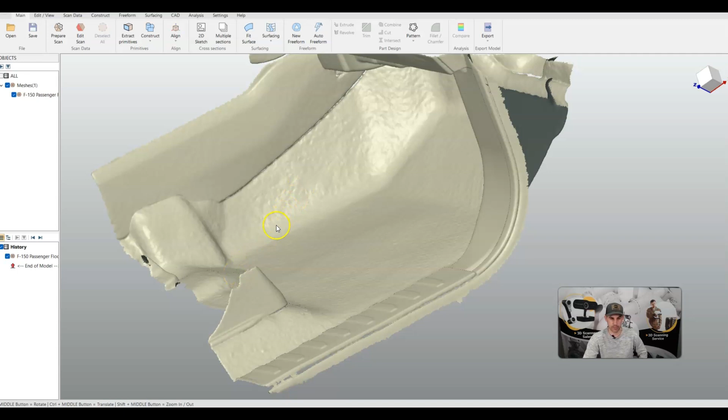All right, so we are now looking at Quick Surface Pro version 2025. I have brought a scan already in here. This is one that we completed on a large pickup truck, the passenger floor area. And as you can see, there is a lot of floor geometry here.

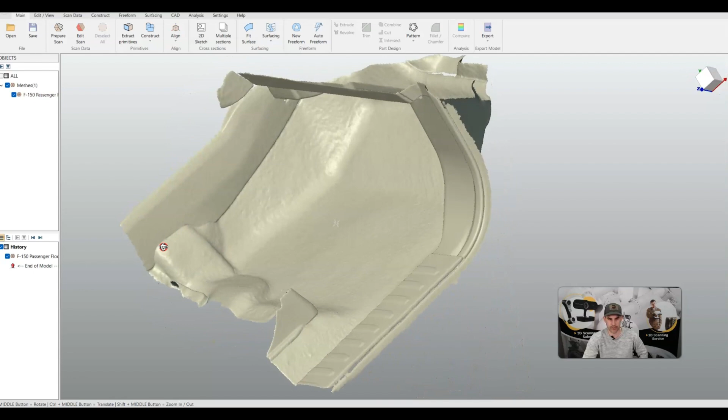I'm going to go a little bit overboard and make different patches for all the different surfaces. So we'll have one for the side of the center console here, the main floor area, where it slopes up, and maybe just a little bit in front of the seat here.

What we need to do, and this is not a very complicated process, is create polylines closing off individual areas. We're going to do that in the Surfacing tab, using 3D Sketch. The default mode it goes to is adding a curve.

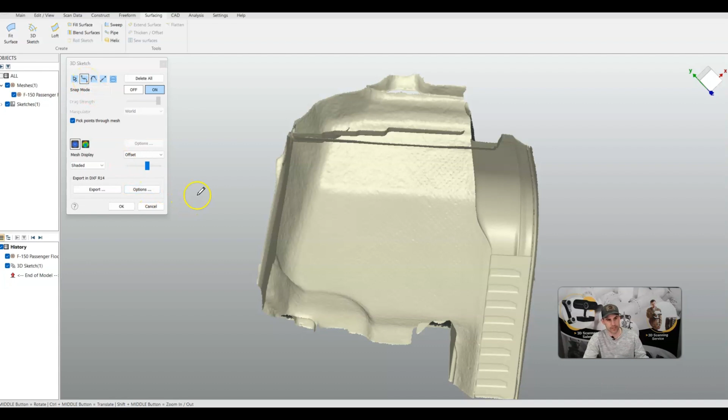So we can basically add polylines along the sides of the areas we want to create. As you bend the line around, it tries to make a nice consistent curve, so you can add as many points as you want to follow a curve. Every time you attach a node, it will reattach it to the mesh underneath in that location. If you double click, it finishes the line, and then we can pick up that again.

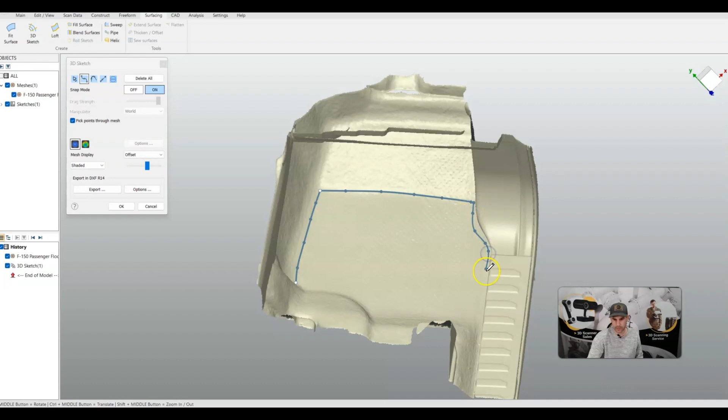Stop one there, and make a nice little S curve right along the door. If you ever make a weird shape or drop a node somewhere you didn't really want to, it's not bad, you can just go ahead and move it right after. I'm going to finish this line here.

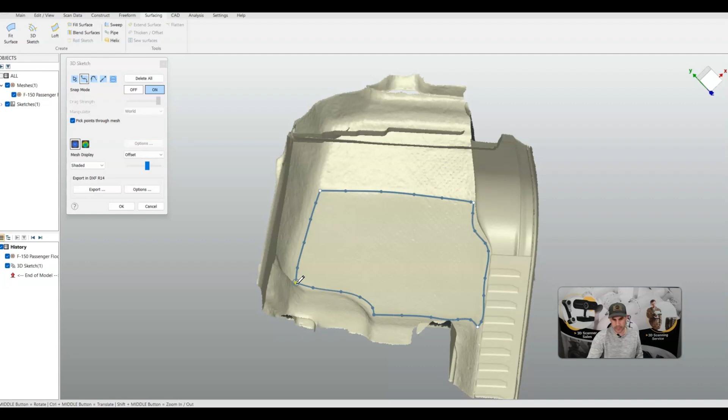So we can pick our pointer selection and zoom in. Let's say we want to move this one here just a little bit over, that's fine, you can edit it very easily. Once we have a complete line around, I'm going to move this one because I did some weird stuff right here. Fix that a little bit.

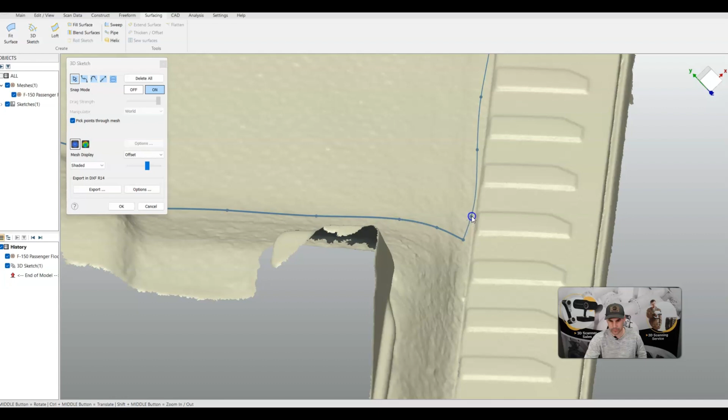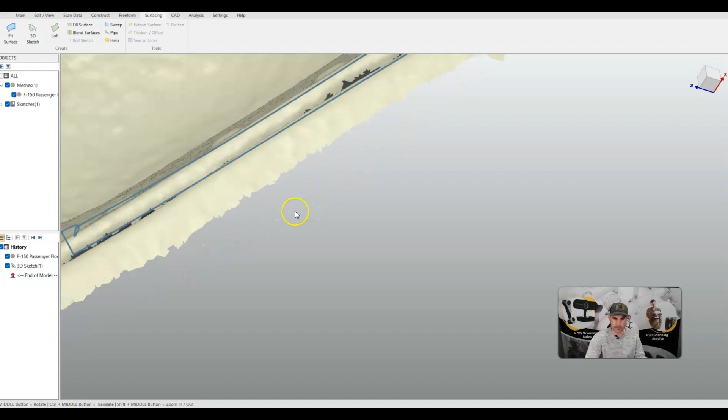That looks a little bit better. So we have one complete shape. What we're going to need to do in order to turn this into a flat piece—if we look at it from the side, it has some 3D shape, it's actually not too bad, it's a little bit flat, but there is some 3D shape to it. So we can't really export this as a 2D shape into whatever the CNC machine or software we're going to use to create the CNC cut surfaces.

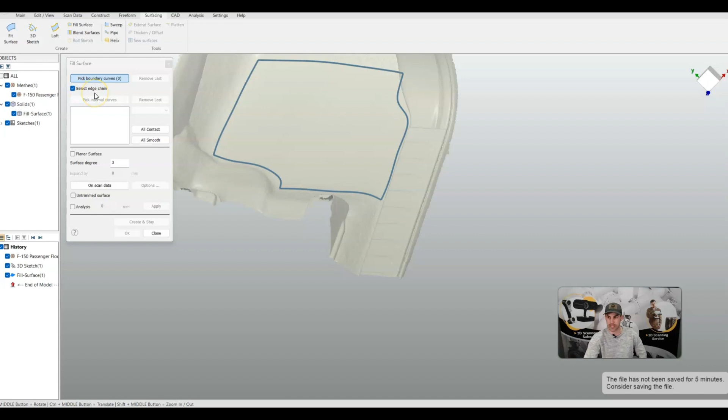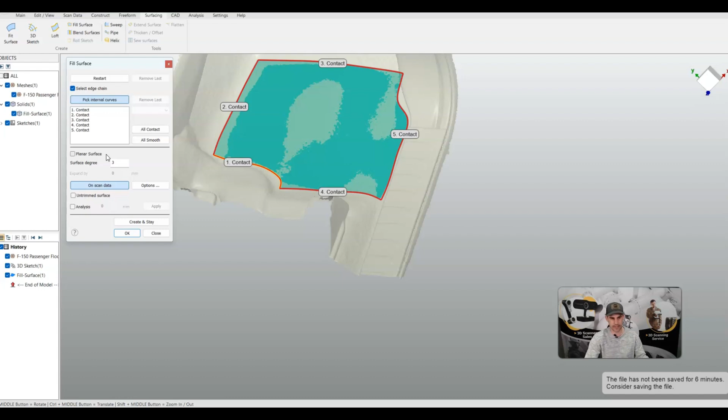So we want to click on our fill surface function. We're going to click on one part of the chain, so you can see it just highlights the part that I'm hovering over. If you have this text box selected where it says select edge chain, it will populate that whole area. You can kind of see how it's interacting with the data—there's a little bit where the line or the plane goes through the scan data. If we click on scan data, it will actually adjust that whole surface to try and fit the underlying scan data very closely. So we're going to say OK.

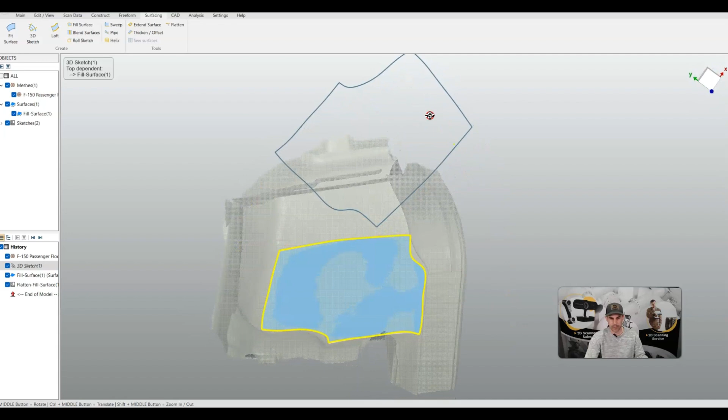And then the last step to make a surface here, we can click on it again, and we have our flatten at the top. We do that and it will just create a 2D cross section out here in space. But as we said in the beginning of this video, we want to do the side of the center console here—we want to go right up to the front. So we're going to create a few more patches.

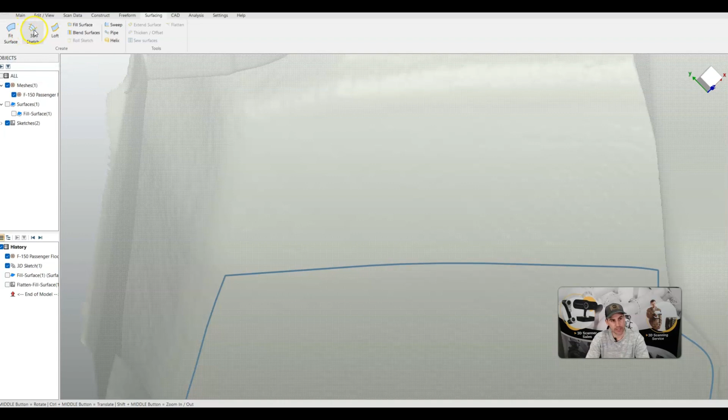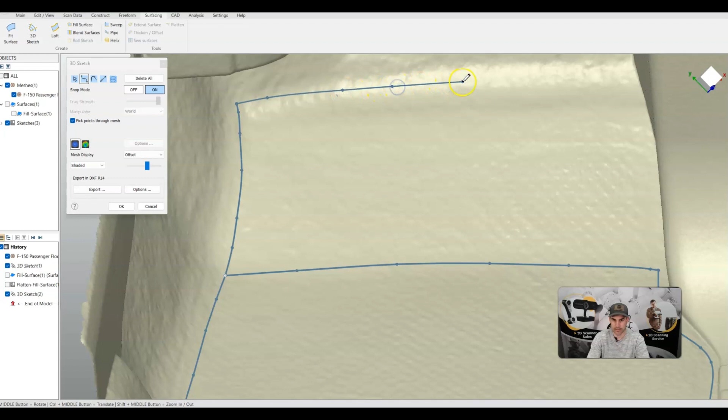The process to add extra panels to this one we already created is going to be pretty simple as well. We're going to go back to our 3D sketching tool, under the surfacing tab, and basically do the same thing we did with the first one, but we can attach the second panel to the first one. So I'm just going to click on the corner node here, and then we can attach all the way across. Yeah, that's pretty close there. Now we've created another box. We're going to hit OK.

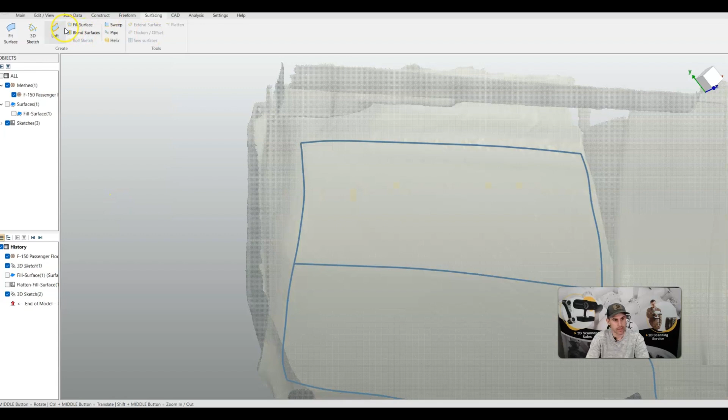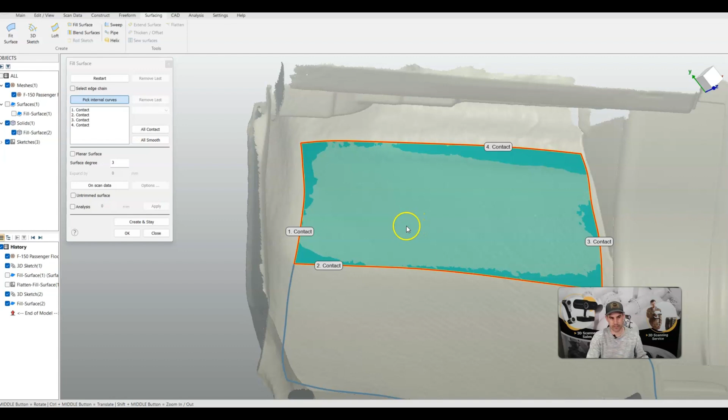And we're going to do that same fill surface, except this time I'm going to deselect the select edge chain. The reason is it will try to select everything connected in order to create a single surface, but we want to actually tell it which ones we want it to select. So connect those four—once we have a complete closed loop, it will automatically give you a preview of the surface. We're going to click on scan data again, and that's going to try and stretch that mesh so it represents the underlying mesh underneath it. We're going to hit OK. Now we have surface number 2.

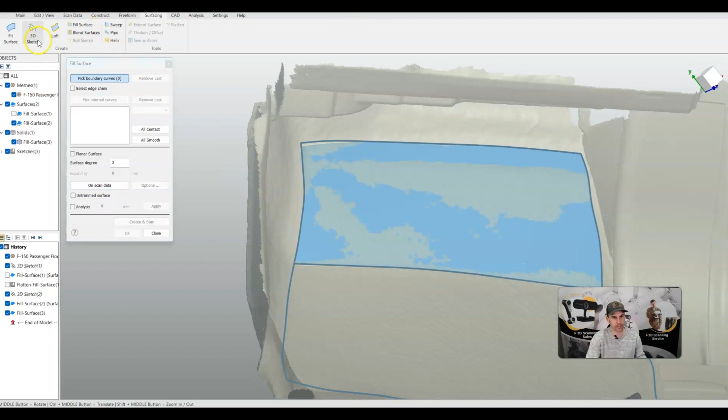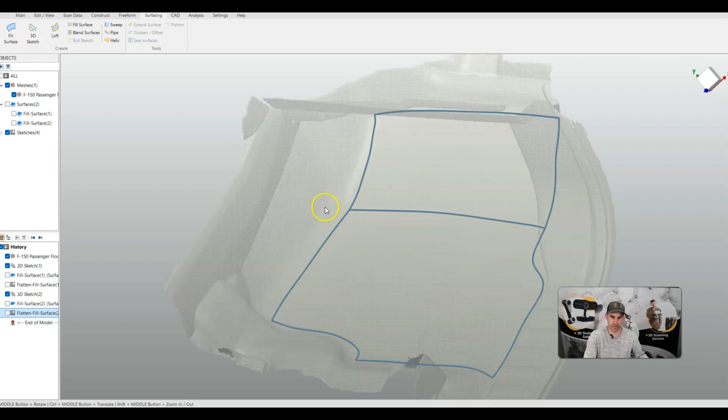And if we want, we can go ahead and do the fill surface—or pardon me, we already did fill surface—flatten as well on this one. So we select that surface and hit flatten. Now we have another one over here. I'm going to hide that flatten and fill again, and I'll do one more with you guys watching, then finish the rest without you watching. So again, 3D sketching tool—I'm going to select this corner node, and we want to come all the way up to the center console. Double click to finish a corner.

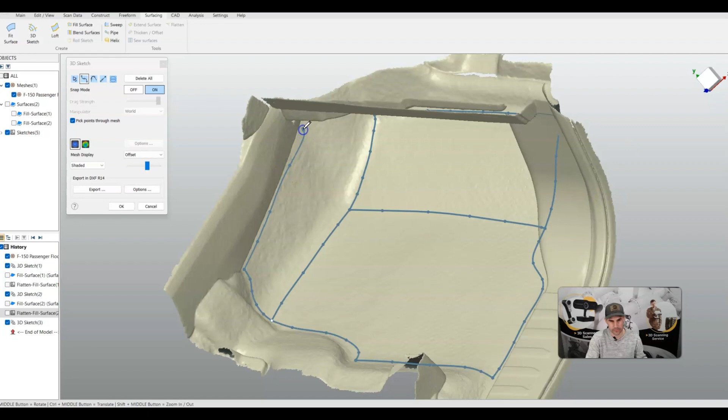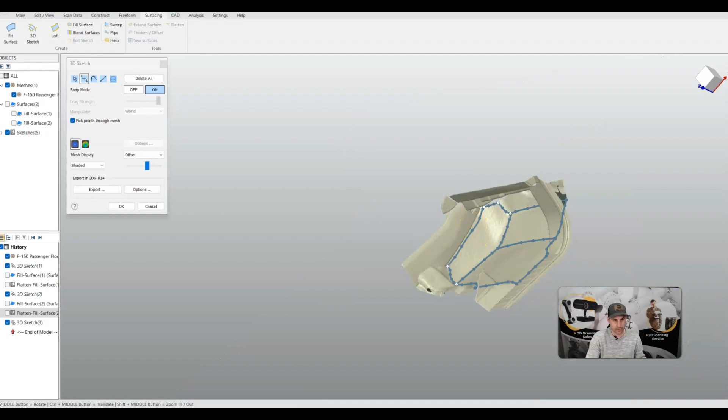So that one is good. We now have three separate little panels here. I'm going to do a fill surface on this third one.

We select the edge chain that we want to use. Once we have a closed loop, it will fill it with what it thinks is going to be a surface that represents that. But we want it to be on scan data to try and represent the geometry between all these little polylines that we created, and that looks pretty good.

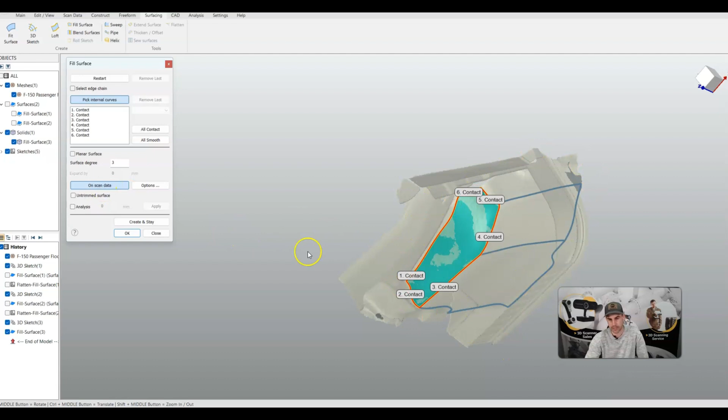We'll hit OK one more time. You can see it's pretty simple. We have a third little panel here.

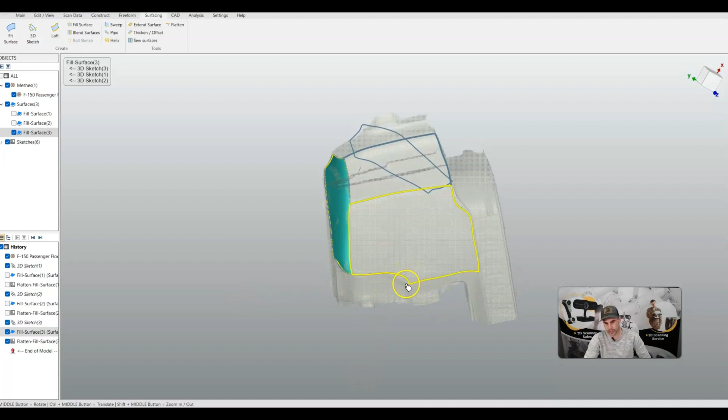The process of creating each little patch is actually quite straightforward. I'm going to do a few more without recording just inside of here. Then we're going to be left with a little pile of these 2D parts that we can send over to our CNC table.

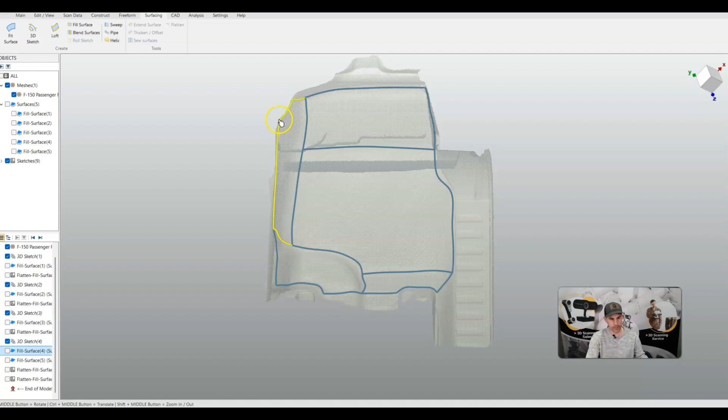So just to review, we're looking at our little model here. We have all these nice closed little polylines making these little patches, if you will. And then we created all these fill surfaces. So we can select on all these again.

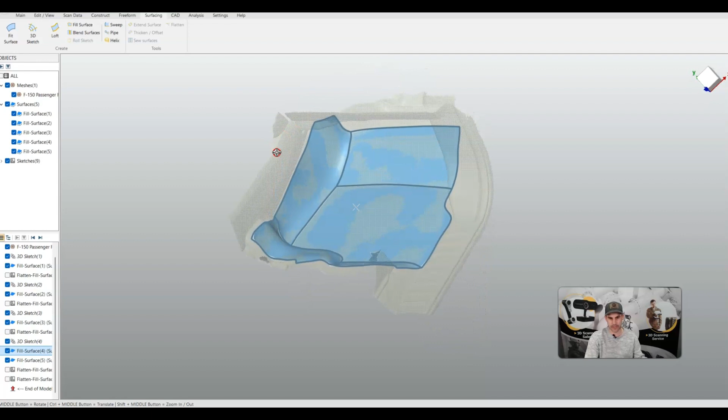There's a couple more here just behind my pause button, so I can't actually hit them right now. Oh, there we go. So we have all these fill surfaces, but they are 3D surfaces, which is not something we can really use in our CNC software.

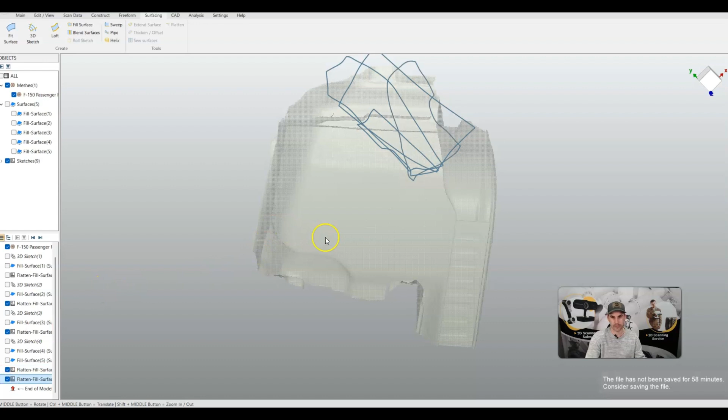So I'm just going to inverse all this and just look at our flattened surfaces. We have those and a couple more there. These are all 2D, sitting on the same plane, right around the 0,0 axis, which is why they're just kind of floating out there in space. Each one of these is now ready to export.

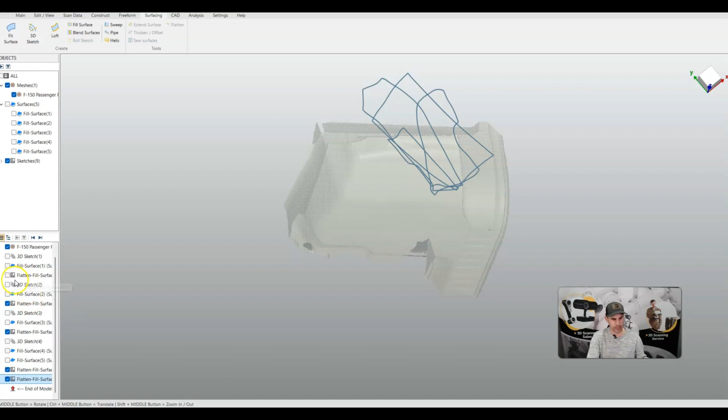They will be exported as a DXF file. There's one more I missed. If we double click on one of these in our little feature tree in the bottom left, our object tree...

If you look at the menu that pops up, at the lower end of it you'll have DXF. R14 is the version I'm going to be playing with, and you have the options. There's a few different other formats you can work in, like IGES, DXF R12.

You can transfer it right to Inventor, but we're more interested in the DXF format here. So we're going to leave that as it is, hit export, and you can save that file now as a DXF file.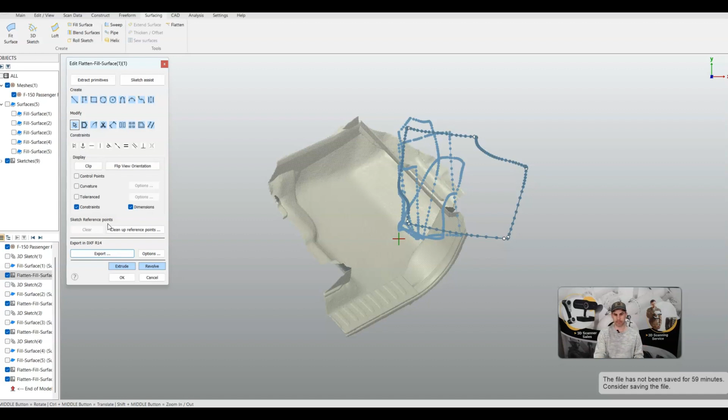That 2D file is what you're going to use in your CNC table or whatever software you'll be using after you're done creating this. But those pieces, even though they're a two-dimensional file, once they're created and built into 3D space, they will fit perfectly as they would if they were the original 3D polyline box that you created on the mesh file.

So that is the entire process. Just to review everything from start to finish: we use a Scantech scanner to get our scan data, simply because it was the only scanner we've tried that consistently gave us very good results.

Once we had our scan data, we brought it into Quick Surface — we were using Quick Surface 2025 today. We need to draw our polylines around the areas that we want to create, in this case a floor mat for. This isn't going to be necessarily exclusive for floor mats; you could use it for any other similar 3D application, but we're going to stick with floor mats for the purpose of this video.

We fill in that little closed loop we've now made to create a fill surface that mimics the scan data underneath it. Then we flatten that surface to create a 2D file. That 2D file is the DXF that we export, and we can now use in our CNC cutting machine to create our actual physical patches.

And that's it. I wish there was more that I could tell you, but it is such a simple process. Quick Surface does such a good job that this is a very simple video.